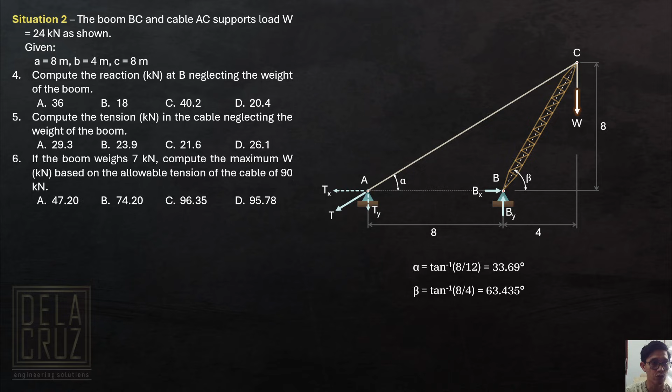Alpha is arc tangent of opposite side, that's 8. Adjacent side is a total of 12, 8 over 12. So, alpha is 33.69. Para sa beta naman, I will be using this right triangle. So, beta is arc tangent of 8 over adjacent side 4. So, we have 63.435 degrees. Okay, ilagay ko lang sa figure, 33.69 and 63.435 degrees.

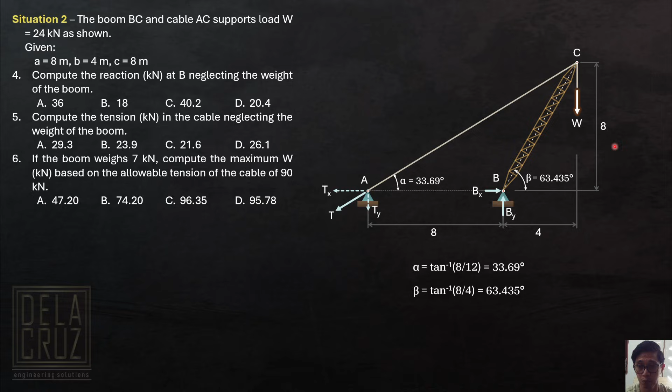First two problems, neglecting the weight of the boom. Okay, compute the reaction at B and the tension in the cable. Now, itong reaction natin sa B, that is not only BX, that is not only BY. Pag sinabing reaction, it is understood as total reaction doon sa pin. So, it must be total reaction RB. Okay, ngayon, para makuha natin yung RB, theoretically, we need to solve for components BX at BY. Because RB is the resultant. RB is square root of BX squared plus BY squared. How do you solve each of the reaction?

We can solve for the component BY. Magmo-moment tayo sa A to eliminate this one. Tingnan nyo. Summation of moment about A is 0. Okay, unahin ko yung ikot ng weight clockwise about A. So that's 24. 24 times moment arm, a total of 12. Ang BY naman, iikot counterclockwise. So minus BY times 8 equals 0. You can separately solve for BY. Pwede mo siyang kunin yung BY mismo.

But, notice by the concept of two-force member. Observe nyo lang mabuti. Two-force member ang boom BC. Ano nga yung two-force member? Ang forces nag-act only sa dalawang points, at point B and at point C. Pag ganun yung case, basta dalawang forces lang acting on the member at 2 points, sigurado ang total force dito, RB, is pointing to the other end. Meaning, ang RB pala is aligned with the boom BC. Ano ang advantage niyan? If RB is aligned with the boom BC, the angle of RB is 63.435 degrees.

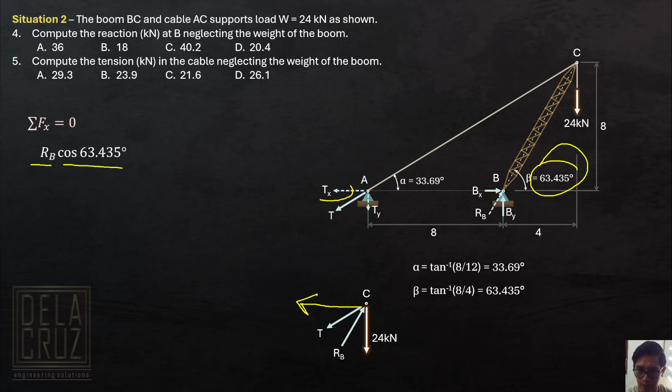Summation of forces horizontal. Tingnan nyo nang mabuti. Component RB horizontal. Actually, that's the Bx. But since there is an angle, that will be RB cosine of the angle. Component T to the left, the Tx, minus T cosine 33.69 equal to 0. Equation 1. RB and tension ang unknown.

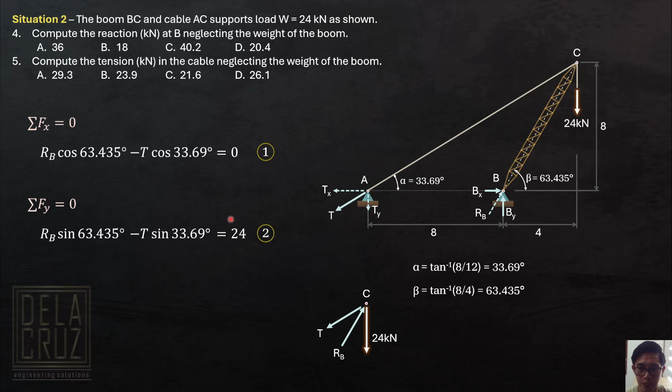Summation of forces vertical. Component RB upward, RB sine of 63.435. Component of tension downward, minus T sine of 33.69. Okay, minus 24, or transpose to the right side equal to 24. Again, minus 24 equals 0 yan, pero i-transpose natin magiging positive. Okay? So, dapat yung constant value nasa right side ng equation so that magamitan siya ng mode 5.1 sa calculator. So, RB and T, simultaneously, makukuha natin sila agad.

I think, hindi ko na ipapakita yung calculator, no? Baka mapahaba tayo. Paano naman kami, sir, na hindi pa namin alam? Sige, pakita na lang natin. Mabilisan lang. You can always replay naman. Let me open our calculator.

Mode 5.1. Applicable lang po to equations two unknowns if the equations are linear. Meaning, the unknowns are first degree or wala siyang exponent. The exponent is 1. Okay? So, ang ilalagay lang po natin are the coefficients. First, cosine of 63.435. Okay, that's the first equation. Check ko lang if nakikita nyo ba sa screen. Okay. So, equals. Next is minus, negative siya, minus cosine of 33.69.

Then 0. Second equation, sine of 63.435. And minus T, or minus sine of 33.69. And ang constant, 24. Okay, after that, equal, kuha natin siya.

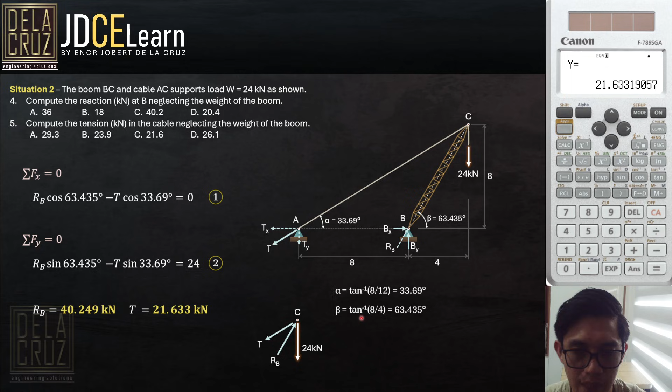Okay. So ngayon, sa part 3 ng problem, the weight of the boom is now considered. So, merong 7 kilonewtons weight ang boom. And of course, the weight is always vertical downward. Now, if not stated, automatic po, yung location niya nasa gitna talaga. So, if this is 4 meters horizontally, the distance will be 2 meters, kung hindi siya stated. Tingnan niyo yung mangyayari.

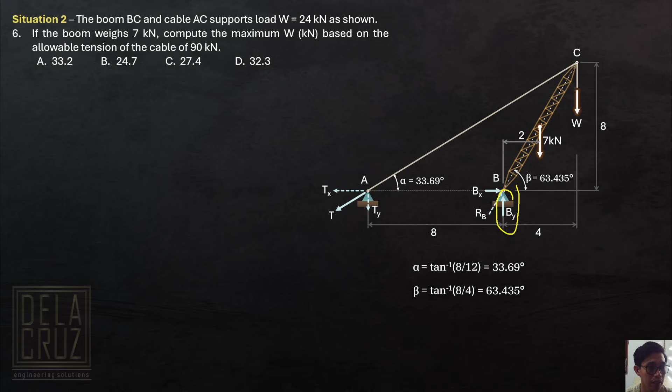Nung lalagyan natin siya ng weight dito, nung wala pa yung weight, diba yung reaction sa B is aligned because BC is a two-force member. Pero pag dinagdagan natin ng isang force at another location, that member is not a two-force member anymore. So, mangyayari dyan, dinagdagan mo ng vertical force, lalaki ang vertical force na yan. Kung lalaki ang vertical force, ang RB, hindi na yan aligned dyan. Iba na yung angle dyan.

So, ito na yung mangyari. Hindi na po siya two-force member. Meaning, ang angle ng RB is not 63.435 degrees anymore. Hindi mo na pwedeng gawin BY in terms of RB. Hindi mo na pwedeng BX in terms of RB because that is not the angle of RB anymore. So, paano kukunin, sir? Kailangan mo talagang isa-isahin BX at BY through statics. Hindi na pwede yung summation of forces vertical, horizontal kanina, two equations, hindi na pwede.

But anyway, in this condition, hindi naman to kailangan i-over-analyze, no? Sabi lang, ano daw yung pinakamalaking W based on the allowable tension of the cable. So, to eliminate that one, magmo-moment lang tayo dito. Summation of moment about B equals 0. Okay, kasi yung kailangan lang natin i-relate is yung tension at itong W.

So, una, W times 4 clockwise. That's clockwise at B. Next, ang 7, clockwise din siya, 7 times 2. Okay, ang TY counterclockwise. Minus TY times 8 equals 0. Ang TY, that is still the component of the tension. Parati yung tension sa cable, class, parati po along sa line. So meaning, ang TY is T sine of 33.69.

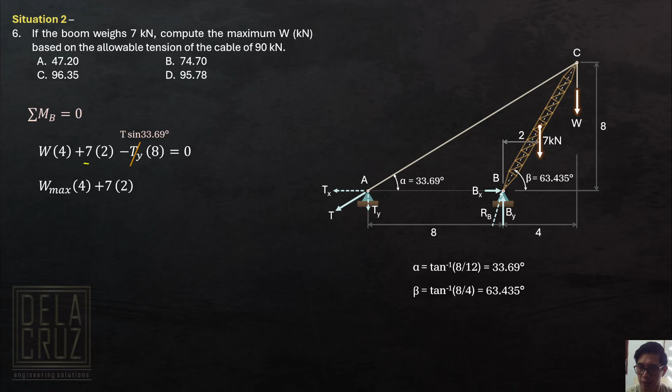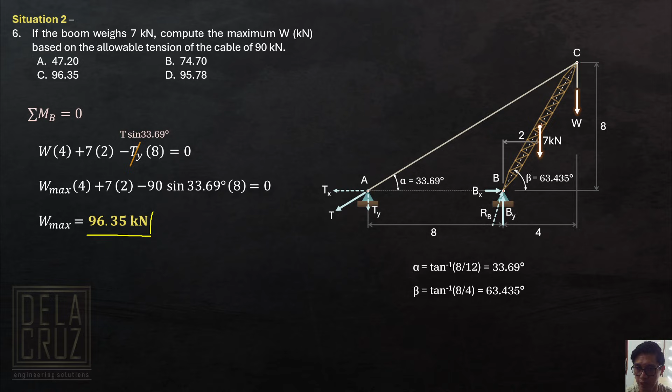Okay, so W max, kung gagamitin natin yung allowable tension, pinakamalaking W yung makukuha natin. W times 4, 7 times 2, I just bring that down. Then ito, lagyan ko ng value. Gagamitin natin yung allowable tension, which is 90. Okay? 90 sine 33.69 times 8 equals 0. So the maximum W na kayang i-lift is 96.35 kilonewtons. That's letter C.